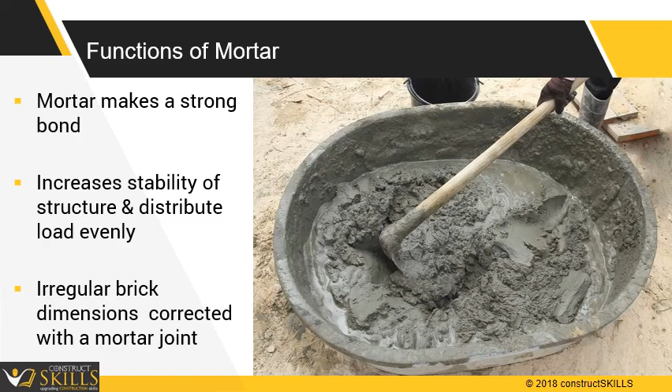In this guide, we are going to discuss important requirements, characteristics and properties of commonly used mortars. Functions of mortar. Mortar makes a strong bond, which in turn increases the stability of the structure and distributes the loads evenly. Also, irregular brick dimensions can be corrected with a good mortar joint.

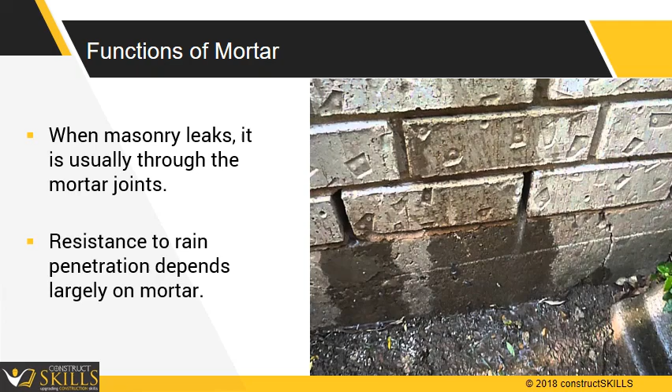When masonry leaks, it is usually through the mortar joints. Resistance to rain penetration depends largely on the strength of the bond between the masonry unit and the mortar. Types of mortar. Mortars could be broadly classified as cement mortars, lime mortars and cement lime mortars.

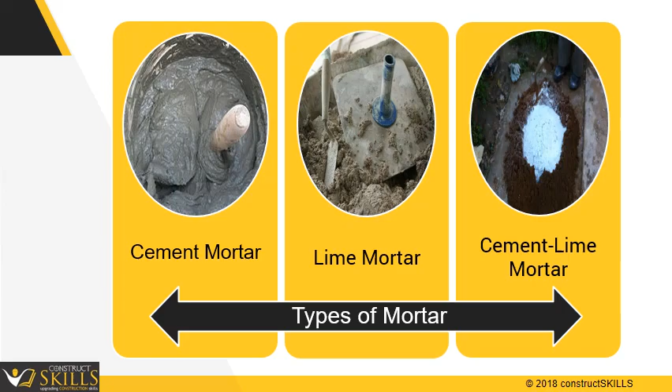Cement mortar. These consist of cement and sand, varying in proportion from 1:8 to 1:3. Strength and workability improve as the proportion of cement increases. Mortars richer than 1:3 are not used in masonry because these cause high shrinkage and do not increase the strength of masonry. Mortars leaner than 1:5 tend to become harsh and unworkable and are prone to segregation. Cement mortars set early and gain strength.

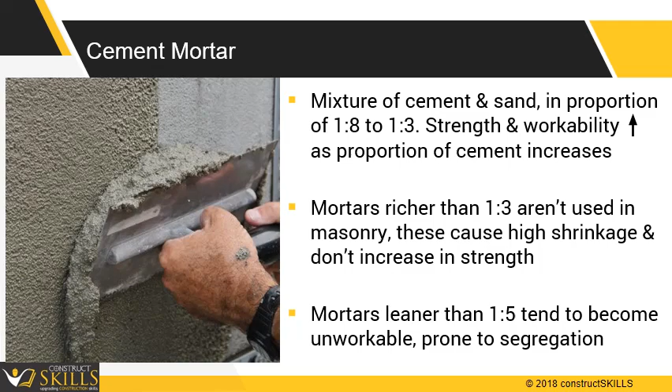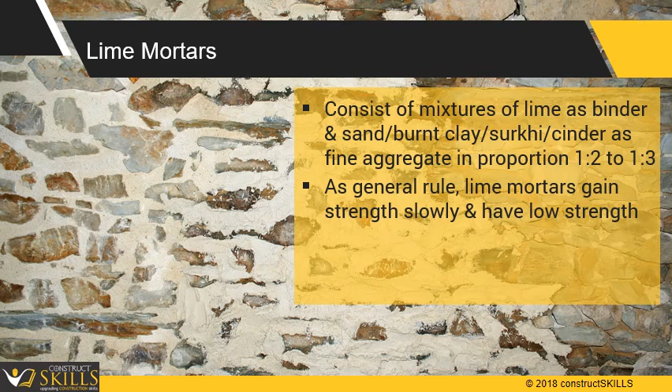Lime mortars. These consist of intimate mixtures of lime as binder and sand, burnt clay, surkhi, cinder as fine aggregate in the proportion 1:2 to 1:3. As a general rule, lime mortars gain strength slowly and have low ultimate strength. Masonry in lime mortar has better resistance against rain penetration and is less liable to cracking.

Cement lime mortar. These mortars have the good qualities of cement as well as lime. Mortars have medium strength, good workability, good water retentivity, freedom from cracks, and good resistance against rain penetration. Commonly adopted proportions of the mortar, cement to lime to sand, are 1:1:6 and 1:2:9. In the rest of the lecture, we will be discussing cement mortar.

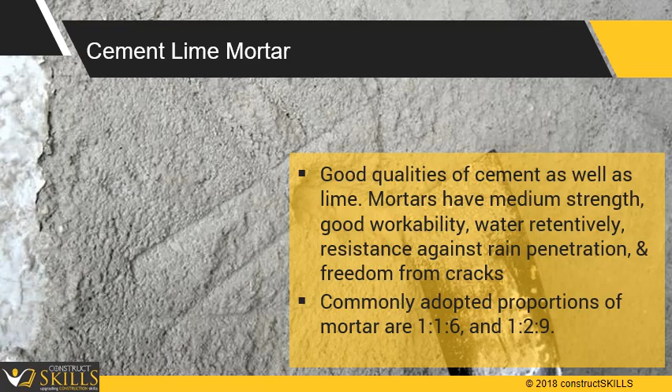Mortar should be in plastic state while being handled by trowel. When mortar is placed between the bricks, it should flow through to all the parts of brick layers to remove the air voids. The two main characteristics of mortar are consistency and workability.

Consistency means having fluidity and water retentivity every time mortar is made. It is the property to hold all the ingredients together. Mix should be good enough to not segregate the mortar components. A strong mortar will have adequate crushing strength as well as adequate tensile and shear strength.

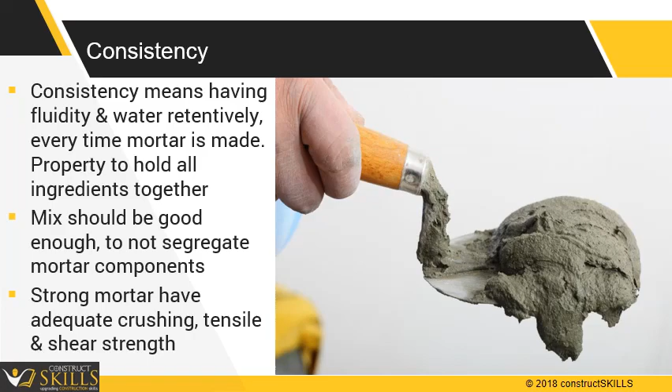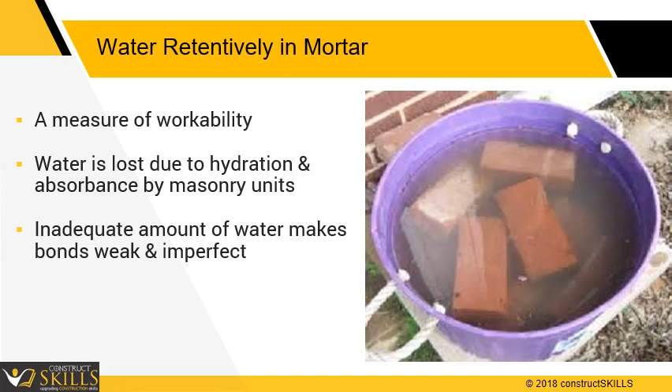Water retentivity in mortar. It indirectly is a measure of workability. It is the property that resists rapid loss of water due to hydration and absorbance by masonry units. Ensure enough water is sprinkled on bricks to prevent shrinkage, as bricks tend to absorb water from mortar. Inadequate amount of water will make bonds weak and imperfect. Wet red bricks to control water absorption before applying mortar.

Workability. That property of freshly mixed mortar which determines the ease and homogeneity with which it can be mixed, placed, compacted and finished. It is the amount of energy to overcome friction and cause full consolidation.

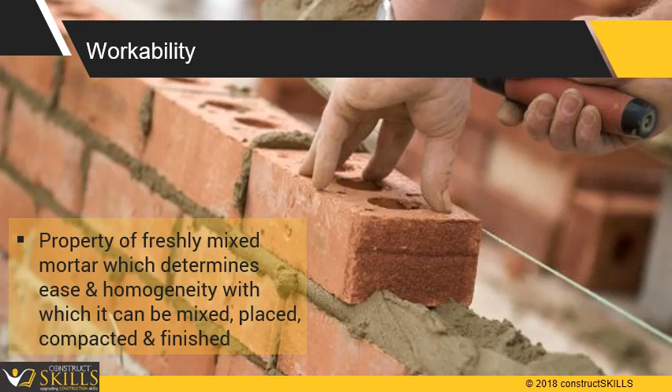Precautions while mixing: use a mixing tray, approximately 10 square feet in size, for mixing. Restore the workability of mortar that stiffens due to evaporation by thoroughly remixing it with additional water. Discard any mortar stiffened by initial setting. Use mortar within 2 hours after addition of water. This period of time may require reducing due to temperature and weather conditions.

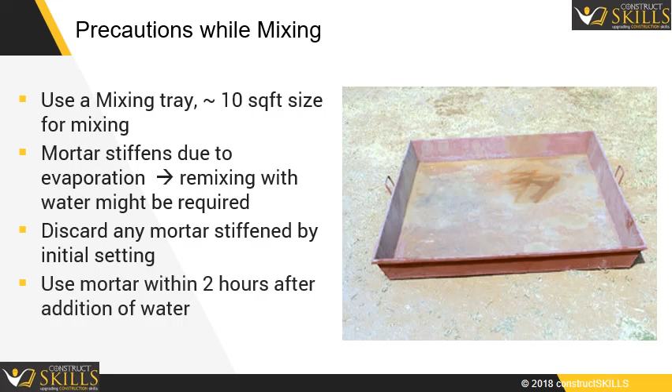Retempering of mortar. In case the mortar has stiffened because of evaporation of water, it may be retempered by adding water as frequently as needed to restore the requirements of consistency. But this retempering shall be permitted only within 60 minutes from the time of addition of cement.

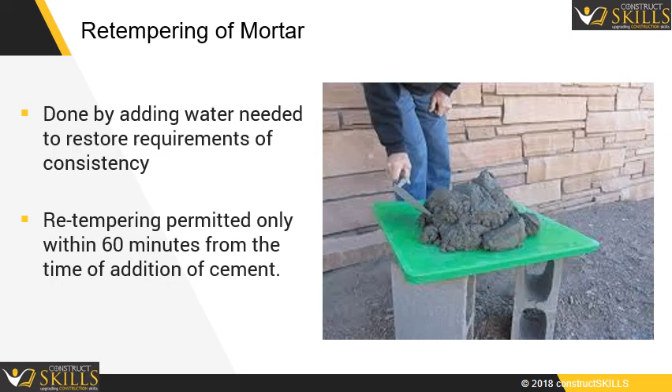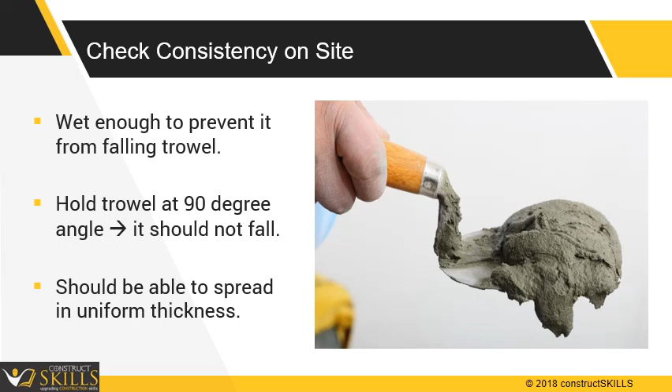How to check consistency on site? It should be wet enough to prevent it from falling off the trowel. To check its consistency, one should hold it at a 90-degree angle and it should not fall. One should be able to spread mortar in uniform thickness.

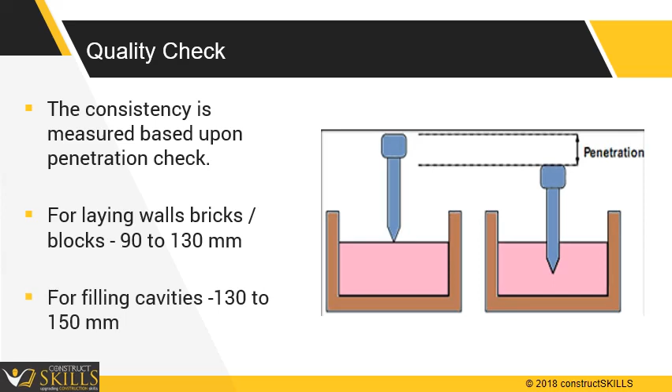Quality check. The consistency can be measured based upon penetration check. For laying walls, bricks or blocks, 90 to 130 millimeters. For filling cavities, 130 to 150 millimeters.

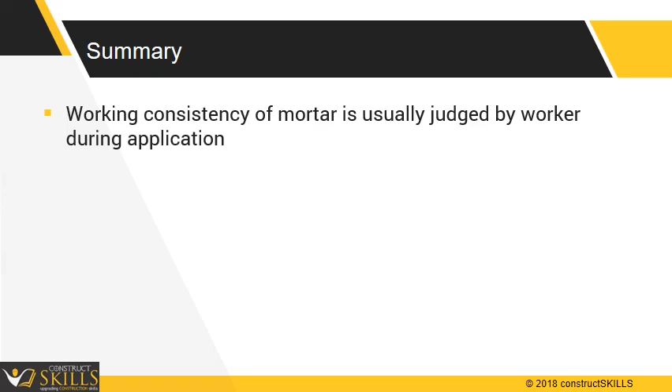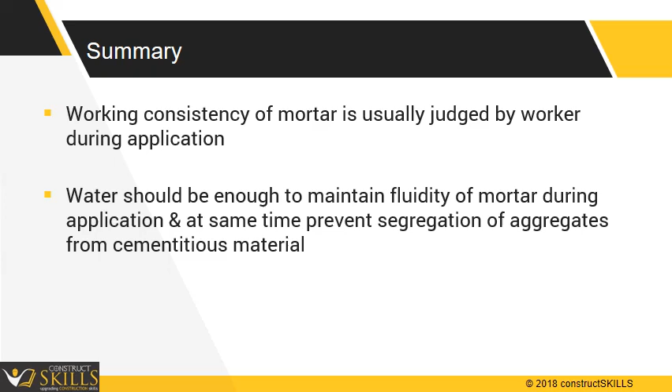The working consistency of the mortar is usually judged by the worker during application. The water should be enough to maintain the fluidity of the mortar during application, and at the same time prevent segregation of aggregates from the cementitious material. The quantity of water needed for maintaining consistency will depend upon the type of masonry.